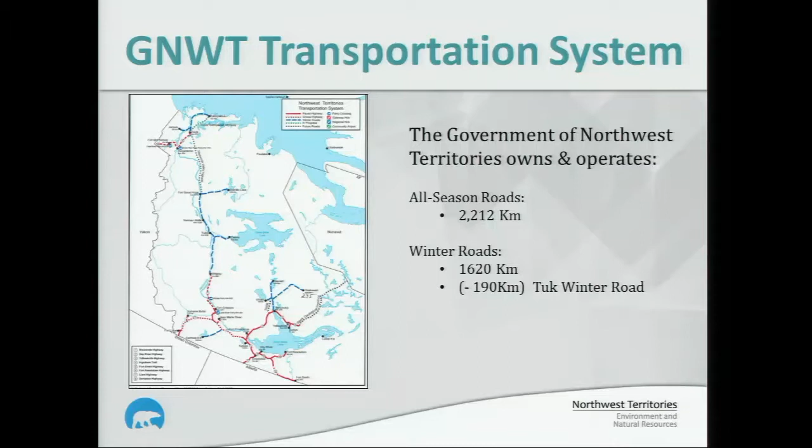The Government of Northwest Territories operates and owns about 2,200 kilometers of all-season road, and we operate about 1,600 kilometers of winter road, minus the 190 kilometers from Inuvik to Tuk, which this year they'll hopefully open this fall - I think November is the planned date right now. So that section of the winter road will no longer be operational. But it just goes to show the volume of winter roads that the Northwest Territories operates.

Separate from government winter roads, in the territories we have some very popular private winter roads - ice road truckers was part of that. By far the largest and most expansive private winter road up here is the JV, or Joint Venture Winter Road, which is a conglomeration of several mines that get together and operate the road as one entity, primarily for efficiency and safety reasons.

They run off the end of our Highway 4, about kilometer 69 on our all-season highway, and then run another up to 600 kilometers to the mine sites. Arguably, they're about the world's largest private winter road network, and probably one of the most efficiently run winter road networks.

Last year, just for stats, they had just over 9,000 loads going northbound, so that's 18,000 plus trucks returning. Just some stats on that.

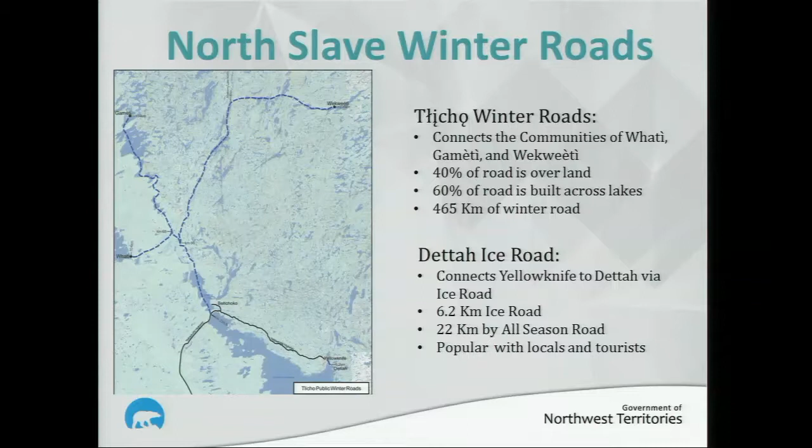People can come home for lunch and supper, back and forth, quite a bit easier. It's very popular with the locals in Yellowknife and with tourism. Anybody that comes up to Yellowknife in the winter, one of the first ambitions they have is to go down to the Dettah Road.

We have problems on the Dettah Road every year. It gets dark up here in the wintertime quite early, 3:30, 4 o'clock. Our crews will go down in the morning or evening to do a road check, and we'll have tourists laying in the middle of the road that's active and running, operating in the dark with all their lights turned off. Why? Because the northern lights are brighter when it's dark - you see them really well, but when you have headlights come up to you, it's not so good. As funny as it sounds, it's true.

A lot of people don't really think of the safety aspect of that. For the Dettah Road, we construct and maintain it ourselves with our own crews. So when we go down there with a heavy piece of equipment, a grader or a plow truck, or even a vehicle to do a road check, sometimes it's difficult to make them understand that you can't lay in the middle of the road - you've got to go over to the side. We plowed that road 50 meters wide, there's a reason for that, you can stay on the side. It's just interesting - you wouldn't normally see somebody laying in the middle of a highway, like the 401, looking at northern lights.

Our Tłı̨chǫ winter roads are crucial to the survival of the communities. Each community we go to - Whatì, Gamètì, Wekweètì, and Behchokǫ̀ off the main highway - they're running anywhere between 300 and say 1,800 people population. When you take into account fuel, groceries, construction supplies, all those necessities of keeping a community alive and thriving, they need that access somehow. For these communities, that's their only option to get heavier equipment in - the winter roads. Winter roads obviously reduce cost of living in the communities - power, heat, fuel, groceries, and general materials for themselves. There's also a socio-economic benefit.

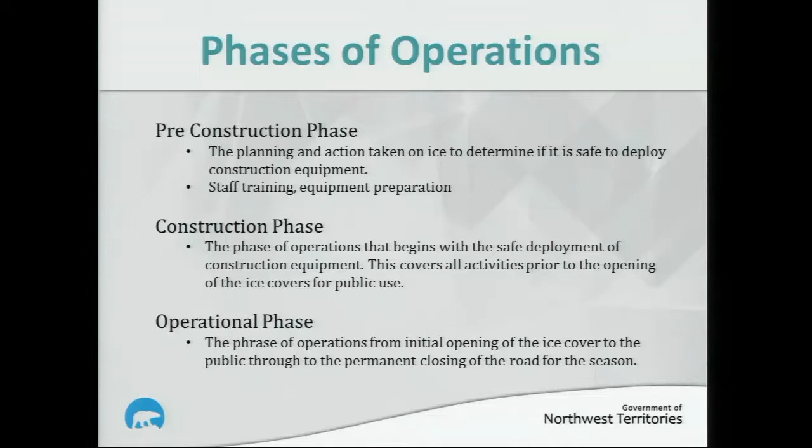So for the operations of our winter roads, we've got three stages: a pre-construction phase, a construction phase, and an operational phase. Those are pretty self-explanatory, okay?

When we're constructing, basically we're constructing an ice sheet on floating water, right? So we're constructing something that's never really meant to be constructed. We need to recognize that the ice sheet deflects and bends under load, and if we're not cautious and don't do things right and proper, and monitor them with controls and checks and balances in place, there is the potential for equipment to break through.

And when we implement our safety program and our rules and checks and balances, it's implemented with the requirement and the need to protect that integrity, right?

So if we go back to the access roads or the winter roads to our communities, if sometime from construction to supply to shutting down that ice sheet breaks or fails or we damage it, we risk not resupplying the community. And what a lot of people don't recognize is that most of our resupply doesn't happen until the very last week or two of our winter road season.

Why? Because we're trying to build ice the whole time to be most efficient, to get the heaviest loads in the quickest amount of time. So if you want fuel to your community or you want to build a house and bring supplies in, you don't want to bring in half loads in February. You want to bring in full loads, or even exception loads, in March.

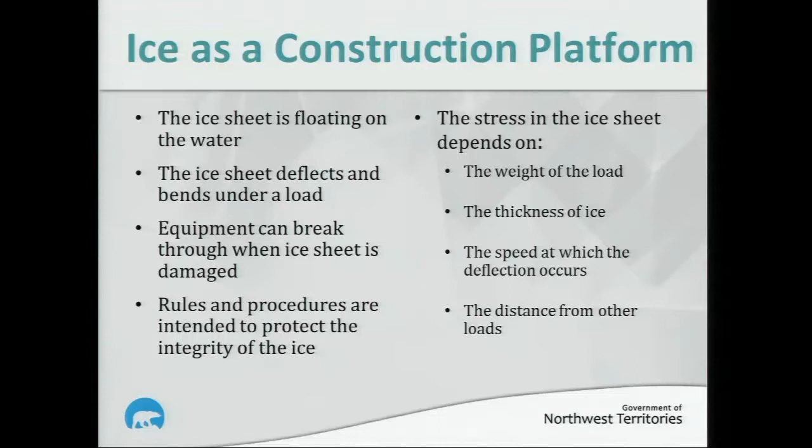So speed is a big item, and for argument's sake, with winter roads, the slower you go on ice, the better. All those shows we watch where the trucker gets out, looks at the ice, gets back in and says 'let's go'—that's for Hollywood. Because that trucker who says 'let's go' potentially breaks up the ice for the guy behind him, who falls through or goes through. So invariably, the slower you go, the better—and when we're really at the high end of our extreme load limits, we'll knock the trucks down to 10 kilometers an hour. For any of us who drive the highway, try doing 10 kilometers an hour for 400 kilometers.

The problem with that is cruise control does not let you go 10 kilometers an hour—you need about 15 to engage it. Our normal operating speeds with our heavy trucks on our roads are about 25 kilometers an hour, but there are extreme cases where we'll slow them right down to 10.

And then separation of loads as they go. When we're talking about ice, there are several different types. When we're doing weight calculations for ice, basically we're calling it blue ice, or clear blue ice, and that's what you're seeing here. You're seeing cracks—that's a normal consistency of ice.

You want it, on most lakes, to be a clear or clearish blue color, and on rivers you get a little bit different consistency, but sort of the same idea. So all the calculations and design specs we have are considered to be clear blue ice.

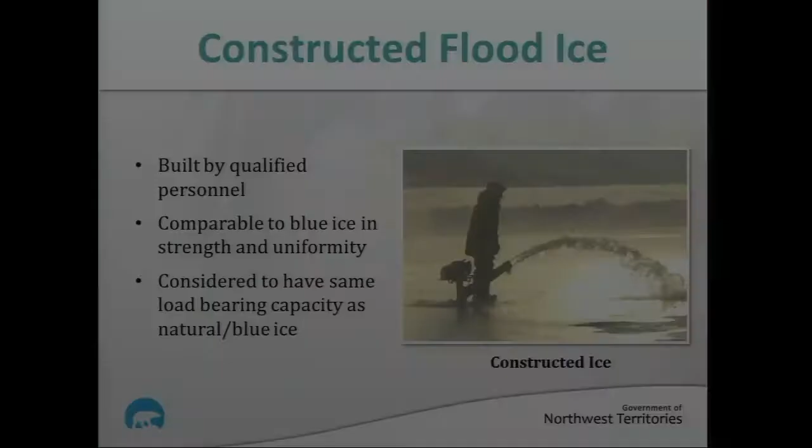There's occasionally sections on 465 kilometers of winter road that aren't quite as thick as we'd like versus the rest. We don't have the budget, ability, or time to flood all of our winter roads. We'll flood rivers because they're relatively short crossings, a kilometer or less, and we'll flood short sections where, on maybe a 300-kilometer winter road, you have 3 kilometers holding you up from a substantial weight increase. So then we'll send flood crews out for that.

Over the years there's been a fair amount of discussion about flooding and the integrity of flooded ice. What our engineers have determined is that as long as the floods are done appropriately, without too much snow and air mixed in, our weight calculations would be the same on flooded ice as they are on natural ice.

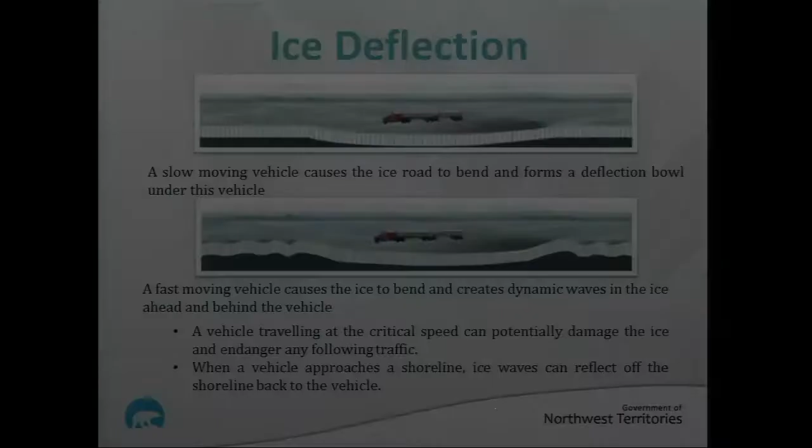Being government, we want a relatively large safety factor. So under normal circumstances, the loads we allow those trucks to run on, and the amount of ice we have, is more ice than we need for those loads. So it's still a critical concern to us, but we don't have someone on each lake watching a truck to make sure they go the right speed. We'll have highway patrol, RCMP, and our own maintenance people out there monitoring. And funny enough, the communities now are becoming quite educated and they understand the importance of this.

More often than not, I hate to admit it, we will get a call from one of the community members saying, hey, we were out there and this truck passed me, or it was coming down the lake really fast. We have only a limited amount of trucking companies that run on the ice. We'll call up one of their safety managers and we've had drivers fired right away for it. The ice trucking, ice construction industry, for all the kilometers we put on, it's a relatively small industry, and they understand that importance. I think last year we had a complaint about one of the fuel truck drivers going north towards Gamètì. He made it back to Highway 3, a vehicle picked him up, and he was let go, just like that. Now, not all our complaints are valid, but certainly we try to keep on top of that.

And then as we get into stretching the envelope of letting heavier loads on thinner ice, then we have more controls and measures in place ourselves.

Okay, so separate from driving on ice, there's this issue of parking on ice or potentially stationary loads on ice. So the calculation is ice is flexible, but it only flexes for so long. What happens is the calculations we have is for a specific load or a specific group of loads to travel across the ice at an approximate specific speed and move on, not to sit out there and park for an extended period of time. So the general rule of thumb is 2 hours. As far as operating practices go, none of our truckers or none of our heavy equipment are allowed to stop and park on the ice. No napping, no sleeping, none of that.

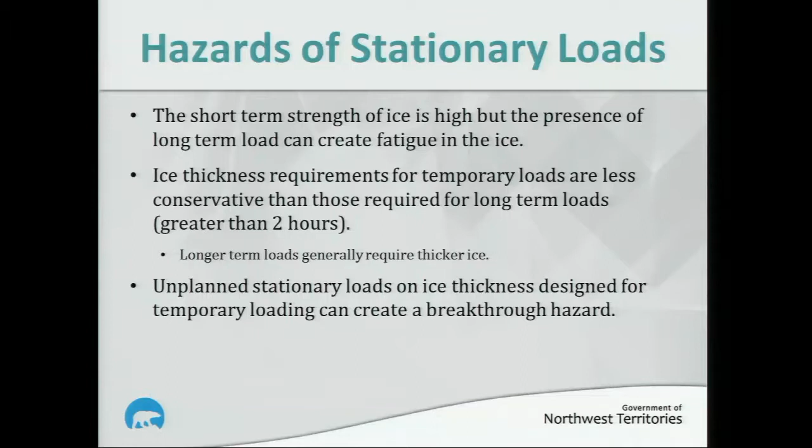The reality is, yes, sometimes something breaks down and we have to recover it. 2 hours, when you're at our max threshold, is acceptable. After 2 hours, we're having to become really cautious, and you run into the issue of the ice starting to fatigue and break.

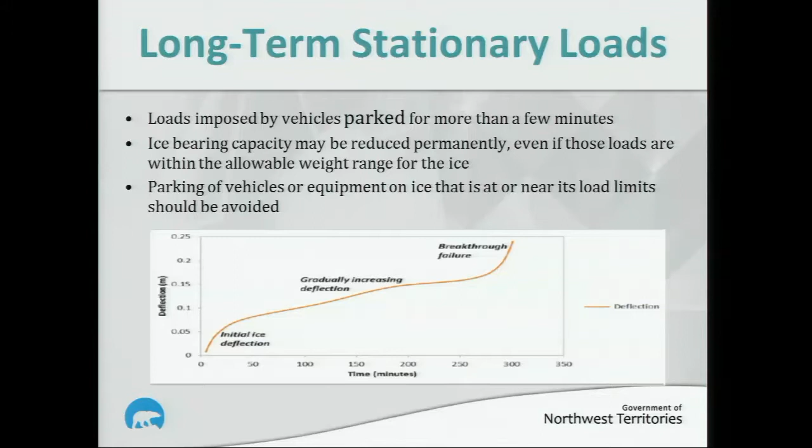Prime example of that was the winter of 2016. We've had challenges like we discussed before about our weather not being normal or inclement, or whatever you want to call it, global warming. We have houseboaters out on the back bay, which probably most of you have seen or will see in the next couple of days. And one gentleman decided he was comfortable with the ice thickness they had.

They drove out to his home there and parked out in front of his place and went to bed, and in the morning his truck was gone. Sounds funny, but he didn't, you know. Now, I'm certain a couple of his neighbors might have said, hey, Jimmy, I'm not sure your truck should really be out here, but it's one of those rare examples where they actually lost a vehicle. Parked it, it was fine, and the ice fatigued overnight and went through.

Okay, ice has cracks in it. It naturally has cracks in it, and then, of course, it has some cracks that we don't particularly want, and this happens to be one of them. You can see the crack running here. Primary reason for this particular cracking is snow load on the banks.

When we get into construction later, we'll talk a bit more about it, but what you want to do when you construct a road is construct it in manageable sections to full width. You don't want to construct, and for years and years, our contractors constructed 20, 30 miles, 10 meters wide. Then they come back, when they're all done, they get their progress payment to get to the mine, or the progress payment to get to wherever they're going, then they come back and start widening it out. Well, the problem is that now you've got a 10-meter wide section that has lots of ice because it's got no insulation, it's freezing really well, and every time you drive back and forth on it, you hairline crack it, it heals, and it produces more ice.

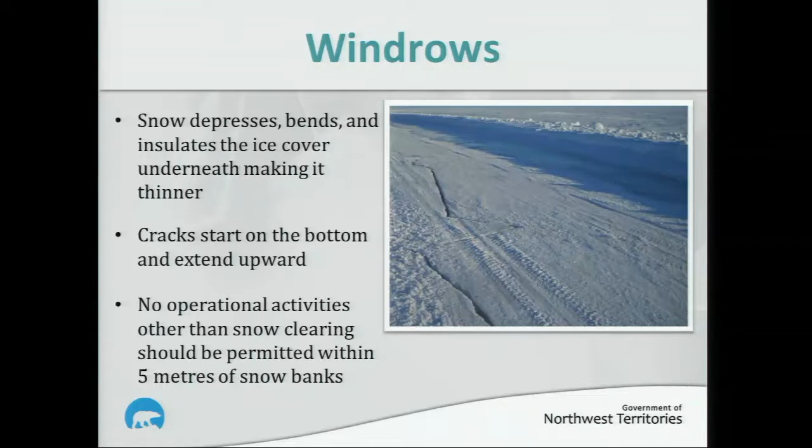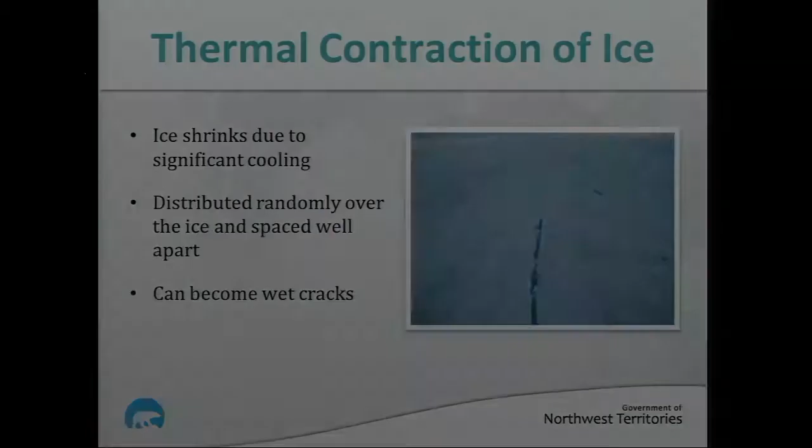Other cracking, okay, so ice shrinks when it gets cold. A lot of people don't realize that. Ice actually shrinks. So this is just from the cold down to the center of the road and ice shrinking. Not necessarily a concern unless it goes through more than about 50% of the ice sheet. In most cases, water at some point will bleed back up, or we'll send maintenance crews out to water them and away they go.

This type of cracking here is very normal for us during the wintertime. As you get close to the end of the heavy haul, you get more and more of that cracking, just from the stresses of the trucks and the weight and that.

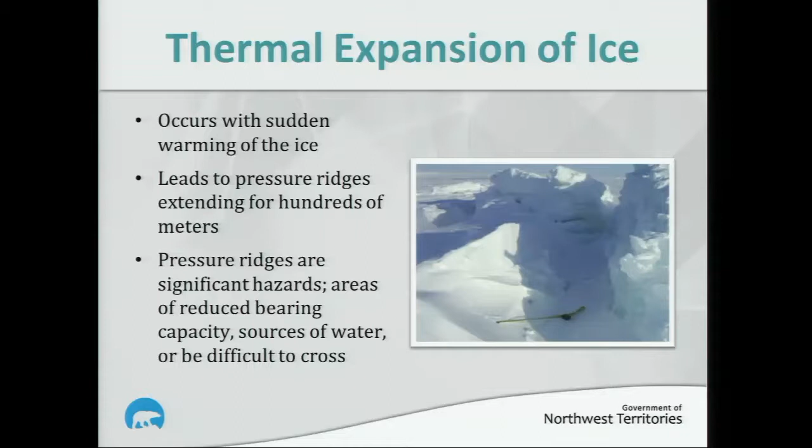This here is the opposite of that. These are pressure ridges that are built. I'm sure most of you have seen fairly substantial pressure ridges going up and down lakes. They can go for miles and miles, and they're problematic for us, of course, because quite often we have trouble safely getting across them. They might have less ice, more ice, broken up, types of issues like that.

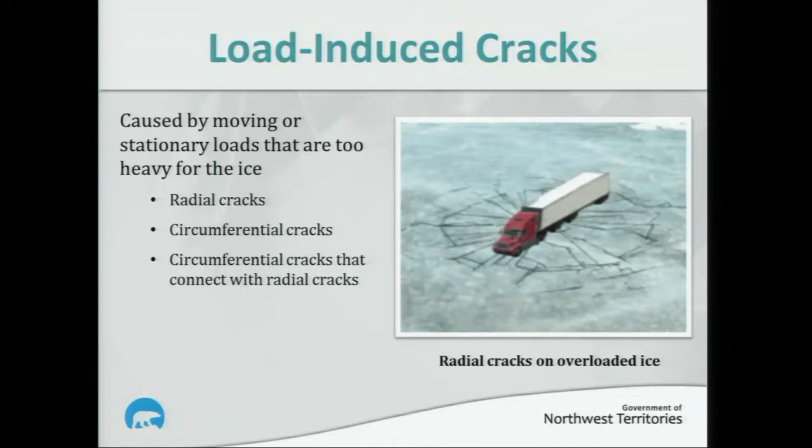And then this is kind of an example we talked about already, fatigue cracking. That's just a load sitting there for too long. You can see how we're getting circumferential cracks, radial cracks, and finally that truck's going to go through.

So for ice, we have levels of confidence in the integrity of the ice sheet, effective thickness of the ice sheet, and accuracy of loading. Those three things. We need to know what our loads are and how much they weigh. We need to know how thick our ice is, and we need to know the ice is fairly good quality ice. Does that make sense?

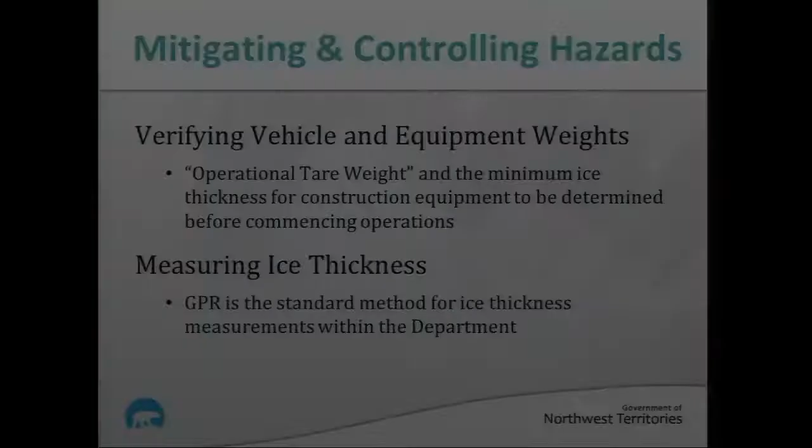As far as weights go, ideally we want to have all our equipment weighed, scaled, and we call it an operational tare weight. That means the weight that equipment's going to be when it's out there operating, whether it's got an attachment on it or not. And then we also want to know the GVW so that you know how much that truck will carry when it's fully loaded.

Measuring ice thicknesses, the old adage of taking an auger and drilling through holes worked. There's new technologies now, and our government believes strongly in ground penetrating radar, GPR, which sends an electrical pulse through the ice to the water, reflects back, and gives us very accurate information, very accurate data. The technology has been around for pretty close to 20 years. User-friendly software's only been around 5 or 6 years.

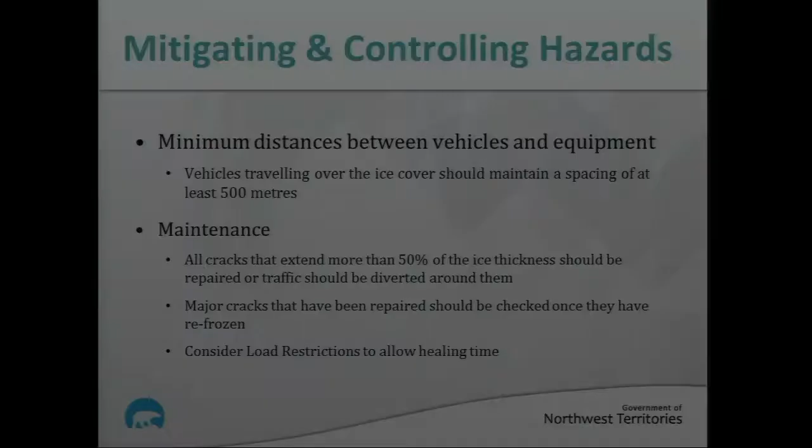As you're aware, the primary construction tool for ice is water. As long as you've got cold temperatures and water, you can pretty much fix over time, if you've got enough time, any issue that happens on the ice.

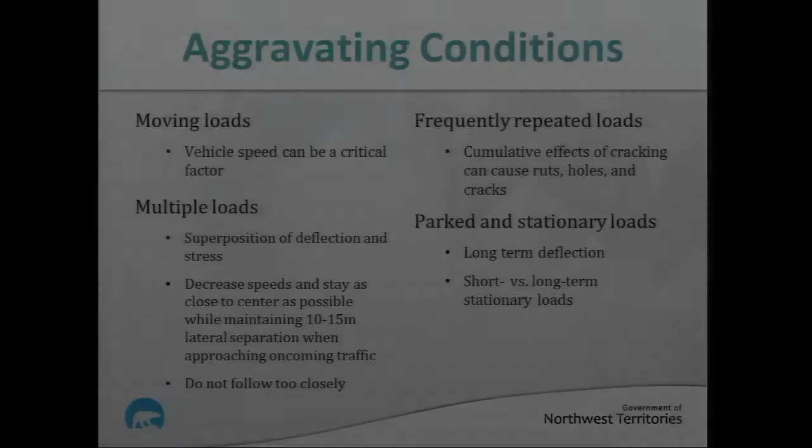Issues of operating on the ice, of course, are moving loads, multiple loads, frequently repeating loads, and parked and stationary loads. We've discussed most of these already. As you get more and more use and heavier loads, the ice is going to be stressed more and more, no different than any other highway system. So you want to monitor it closer and closer.

Again, we talked about weights. Ideally, you want scaled weights. In some of our communities, we're not able to get scaled weights, so they'll use manufacturer specs on some of the stuff. We have access to Highway Patrol, so we'll quite often ask them to take out portable scales and weigh equipment so we know what it does. We'll also use their portable scales for weighing commercial stuff on the road if we're concerned about a weight of something that's on the road.

Again, monitoring vehicles so they're not too close together, and at times we'll send our own staff or Highway Patrol out to enforce safety rules, because there's always someone in the group that wants to stretch that a little bit. Someone doesn't really think that going 20 kilometers an hour makes a difference. It might not make a difference for his particular load, but it'll make a difference for the 600 loads coming after him.

So here we get to calculations for ice bearing capacity. P equals A times H squared, a fairly simple mathematical equation. P being ice bearing capacity in metric kilograms, H being the thickness of your ice in centimeters, and A being a value assigned to that calculation.

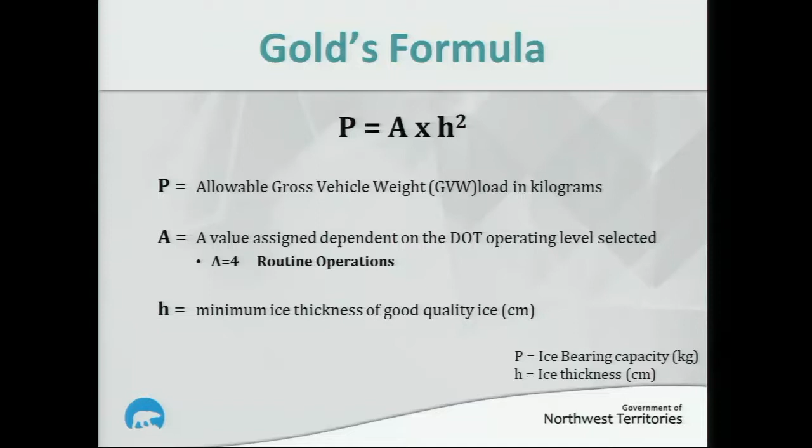For normal operating procedures in the government of Northwest Territories, we use a value of 4. That's a proven number on Gold's formula over several years, and it leaves a substantial safety margin in place. So we talked about controls and measures, we talked about having people out there monitoring. Probably our best control and measure is that value right there, 4. It leaves a fair amount of safety and tolerance.

For example, if the load's slightly heavier than it's supposed to be, we'll probably be okay. If the vehicle's going slightly faster than it's supposed to, we have that little bit of buffer in that value of 4. As you increase that value, your buffer gets less and less.

So standard scenario, we go out and we measure the ice, we have 50 centimeters. 50 times 50 is 2,500, times it by that A value of 4. Which means we assume, following our controls and measures and regulations and that the ice is good quality and all that other good stuff, that 50 centimeters can carry about 10,000 kg. That calculation will work for any thickness of ice you have.

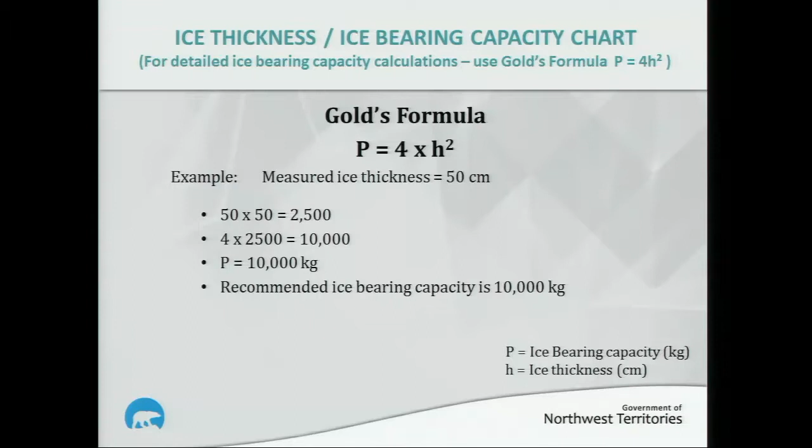Times the height squared times the consistent value of whatever you want to use. We're using 4 in this case, and that'll give you the ice bearing capacity. Any questions on that? Okay.

When we first go out, we'll do some drilling, but we want to profile if at all possible. We're using newer technologies, trying to use either a semi-submersible or a piece of equipment that floats when we first go out on the ice. We've got a little profile unit you can see in the back of that machine. It's a computer antenna that sends a 5 megahertz wave or signal into the ice, back up, reads it, and then allows us to see it on a laptop computer.

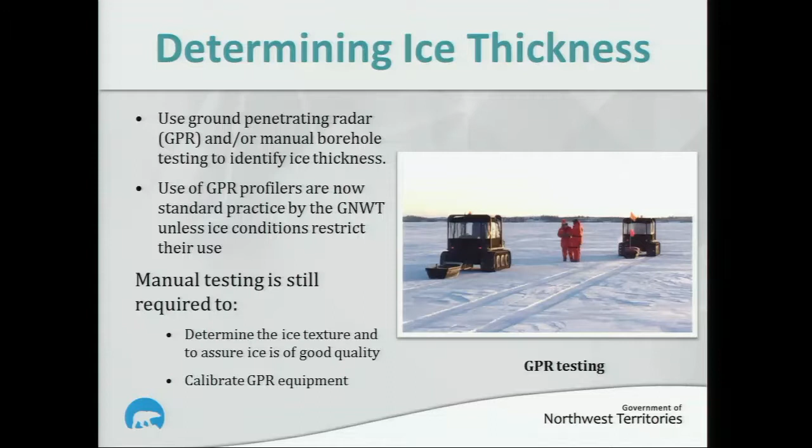Should mention that manual drilling is still required, though. It's required to calibrate the computer on that unit, and it's also required to ensure that the ice we're in is good quality ice versus fractured ice or other types of things. So there are times you need to visibly see that. They are working on new technologies right now that might take some of that into account, but at this point in time, they can't yet, or not reliably.

This is what would be a normal GPR line. You can see Yellowknife here, and you can see the community of Dettah there. So this is about 6.2 clicks. You can manipulate this on a Windows program however you want to, but what it really does is identify the thin spots at a glance. So anything that's yellow or red is thin. You can set the parameters of what you want thin to be when you go out there.

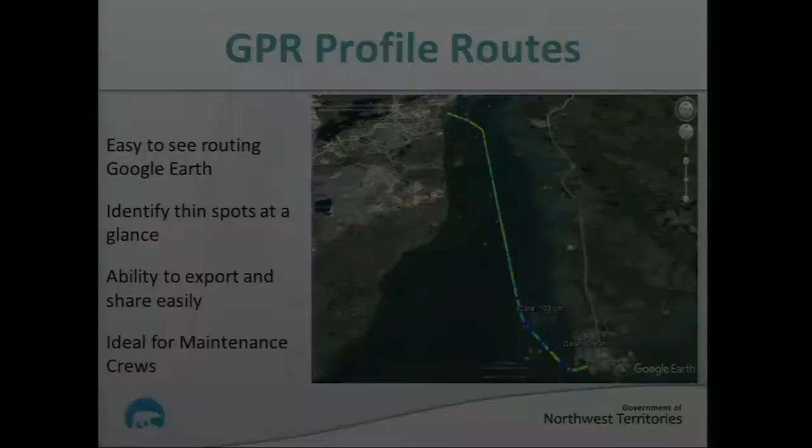It gives you the ability to share the information quickly and easily. And it works really well for maintenance crews, because if I need to, I can send a maintenance crew to that red spot right there, give them within a few meters of exactly where that spot is, and they can do flooding to increase our ice thickness there.

Separate from that, it gives you some very general information without going into the program. In that particular spot that was red that I'm worried about, I can zoom in and it'll tell me. Google Earth is a wonderful program, but it won't pick up all the spots that our actual profile unit shoots, so it'll average maybe 3 to 20 spots, roll them into one dot, and then tell us the average ice thickness, min and max right there.

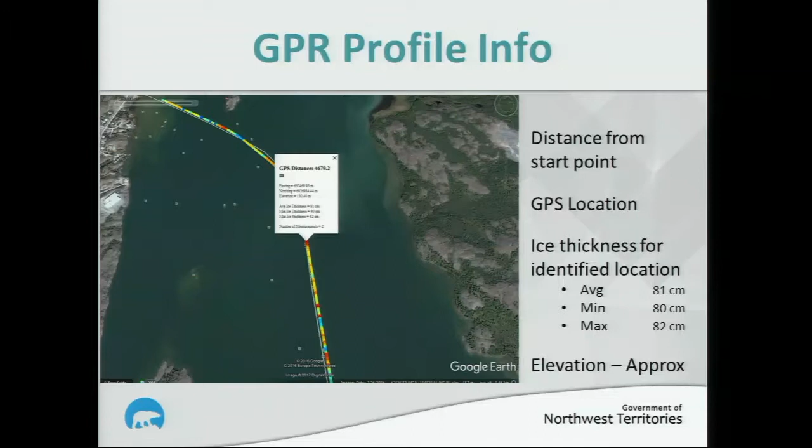We don't use this for determining our minimum ice thickness. We use the program that's more detailed that tells us that. What's nice about this, though, is it's quick and fast, something you can send on to a manager or supervisor or to a maintenance guy that has to go out to location and do some work or a check. Quick, fast, easy, works really well. And we've only been able to do this for about 5 years now.

So we talked about different levels, and we talked about that A value of 4. What the new guides allow us to do now is go into what's called a routine, a normal operating cycle, and then if we need to, an enhanced, and in some cases an acute range. As you go from normal to enhanced to acute, we put more controls and measures in place.

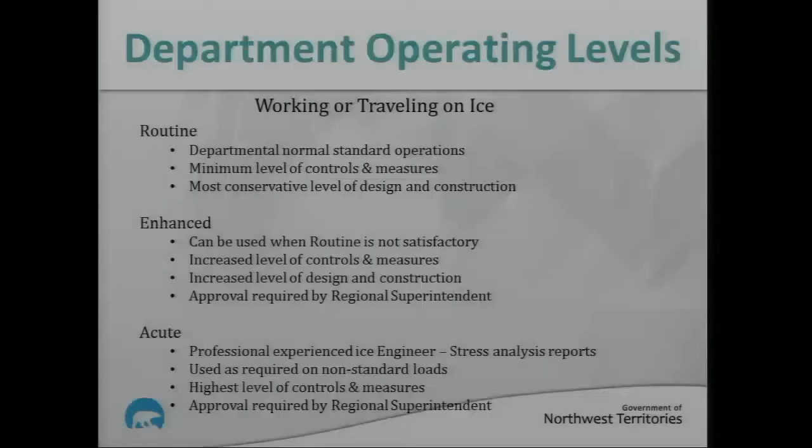We'll check the ice more often, have more monitoring going on, et cetera. Within DOT, or within Department of Infrastructure, we stay within the routine and enhanced modes. Once we get out of the enhanced mode to the acute, we'll then go to an ice engineering company and go away from a single point load that Gold's formula is, instead go to a multi-point load spread over a certain distance, and those calculations will be engineered.

So to put it simply, depending on whether we're doing construction or maintenance, and depending on some other scenarios, we'll use an A value of 4 for routine, an A value of 5 up to a maximum of 6. Usually 5.5 is as far as we'll go on the enhanced, and once we get above 6, that's it, we'll go straight to engineered loads. None of our crews have the ability to go to enhanced or acute without a sign-off from our superintendent, so we have controls and measures in place for that.

Now you're looking at a chart here. Our normal operations: less resources, less robust QA, passive controls, more conservative. As we go up the chart, this allows us, say if we've got 300 kilometers of road and we're trying to get a heavy load into one community, maybe we've only got a stretch of 4 kilometers that's problematic for us that we can't get ice to grow on, or we haven't been able to flood enough to get it to grow on. We can go into the enhanced or acute operations mode for those 4 kilometers.

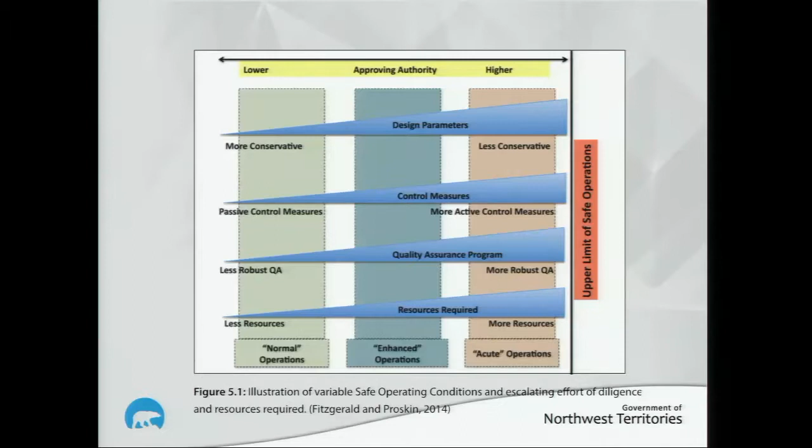We can have staff staged out there, we can have highway patrol out there, we can do additional ice checks closer together, all those kinds of things for that short section, and then go back to normal operations outside that section. That's the big plus of this new guide—it allows us to go to those areas legitimately, following a process, and get our loads into the communities when we need to. With more problematic times on the ice and warmer and warmer temperatures, we're looking at probably having to do this more and more often to be able to do the same things we could do 10, 15 years ago.

Now that we're doing maintenance or running operations on a river, we have the routine mode, the enhanced, and the acute mode. In acute mode, we'll go out there, get information, and provide that information to an experienced ice engineer, and they'll do a stress analysis and let us know whether that load can go or not.

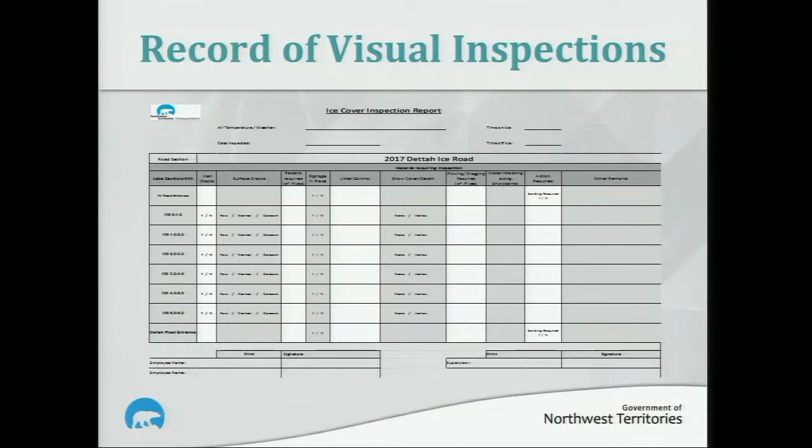The short version is we require our staff to go out and do regular visual checks, and nothing happens unless it's on paper. We talked already about speed limits and spacing, inspections, signage and enforcement, staff training we've discussed for the last 30 minutes or more, and monitoring and reporting.

By law, we have to have, along with workers' compensation requirements and our own, we have to maintain log books, we have to maintain copies of the GPR data files, and inspection reports.

We do as much as we can broadcasting to the public because then they can start planning their loads for the commercial loads, and the public can travel. It's important for people getting out of the communities.

We do Twitter updates now. I don't think we're doing it on Facebook, but we do Twitter and internet updates, as well as winter road entry signage when vehicles go on the roads.

And then we have that authorization process for when we go from normal operations to enhanced and acute. We talked about changing that A value.

So we've gone through the book now, and then the appendices are live documents that we'll continue to work with over time. Some of them were not even absolutely completed yet, but in appendices A, B, and C, they have the different loading charts.

One of the risks we talked about at the very beginning is having the public be aware of everything we do — somebody from the public could say, hey, I'm going to use an A value of 6. If you've got 100 centimeters and you're using an A value of 4, that load's good for 40,000 kg. If you use an A value of 6, that road's suddenly good for 60,000 kg. That's a substantial difference.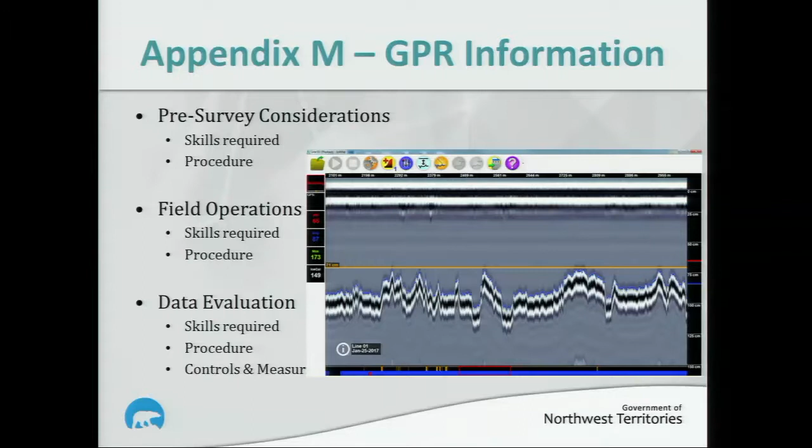We want to make sure we have skilled and qualified field operations, and skilled and qualified people to evaluate that information. So we're back to the exact same things we talked about before: confidence in ice integrity, confidence in ice thickness, and confidence in loading conditions.

We've talked about public safety, community resupply, environmental regulations and issues, risks, and communication. That's the end of the safety portion of the presentation.

I'm running a little shy on time. I have a construction portion if we want to look at, but before we go there, is there any questions on the safety side of it? Yes, sir.

You mentioned a truck really can't sit still for more than 2 hours, and you mentioned one stretch of road that's about 400 kilometers, so that's 40 hours. So do these trucks run team, or what do we do about the safety of a driver? You wouldn't want somebody driving 40 hours. One, it's beyond the hours of service laws. Two, I think they'd get tired.

Correct. Well, to clarify, we don't want any vehicle sitting on a sheet of ice longer than 2 hours. At an A value of 4, it could probably sit there for a couple of days, I gotta be careful saying this. When you get close to an A value of 6, that's a whole different story. So the recommendation is no longer than 2 hours.

But your primary question is, where do they stop, what do they do? Remember we talked about 60% lakes, 40% land, depending on which community we're going to. Our longest lake that we're running the guys on is probably about 38 clicks, and the rest are shorter. So when they get to the portages, we'll find spots for them and plow triple lanes and have areas for them to pull off. Works good.

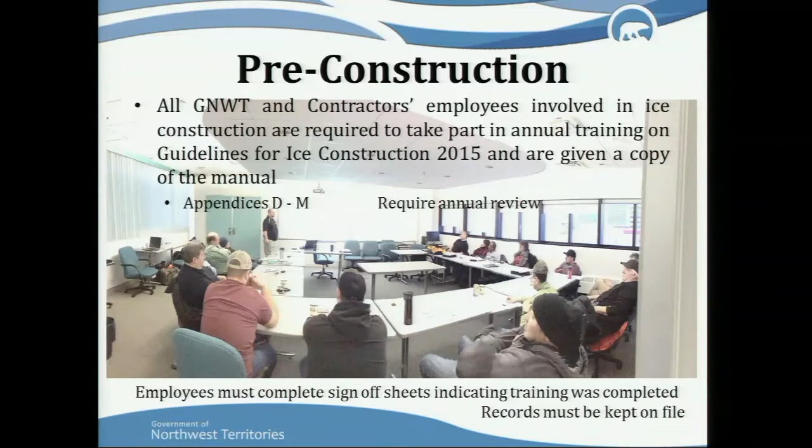First couple slides, we talk again about requirement for annual training. We've gone through most of that. We talked about our new guide, okay? We talked about not only the requirement for annual training and sign-off sheets and having it documented and keeping workers' compensation happy and those types of things, but also the reality now of going out and going to work.

The safe work procedures we have for the crews going out, checking the ice and starting to construct, starting to plow. Got to have daily tailgate meetings, minimum weekly safety meetings, and anytime there's a concern or issue, everything shuts down. We go through it with the supervisors. If supervisors can't fix the problem or are uncomfortable with it, they'll get a hold of myself or someone else. We look at it and then move forward, okay?

Okay, so we talk about the requirement for meetings, safety meetings, making sure we have the proper safety gear, those types of things. Identifying the supervisor, ensuring we log in and log off the ice at each shift. Making sure the shift supervisors communicate back and forth. We want no surprises when our crews are out there, okay?

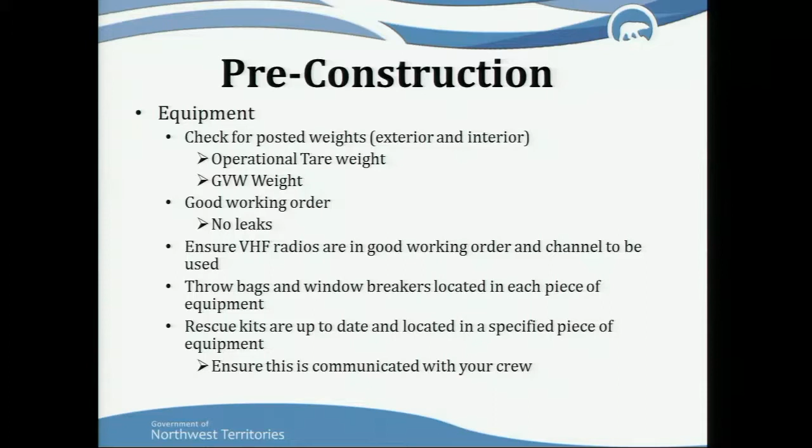Talk about the requirement. Each piece of equipment we have is required to have the operational tare weight and gross weight on both the outside and the inside of the vehicle. We had a supervisor who was given a week off without pay for not having those weights on his equipment. Our drivers have to know what their equipment weighs, and they have to know the ice thickness, okay?

Talking about training and training records, everybody has to ensure that they have had training and are qualified before they're out and operating stuff, right from the laborer to the supervisor, okay?

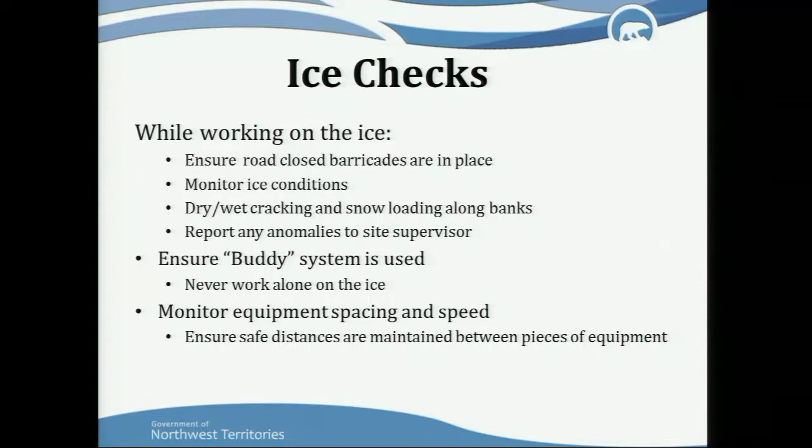We talk about making sure the public is safe while we're working on the road. We've got to have all our road closed signs in place. The public has to know that road is not open. There's so many liabilities that go with that, because when we're out there constructing, we know what ice thickness there is, and we know what our vehicles weigh. The public is just interested, they just want to get out early, right?

Okay, we talked about using GPR for profiling when we first go out on the ice. This is a job I helped on out of Tsiigehtchic, close to Inuvik.

No profiler is going to go over that, right? It's not going to. So there's still times we have to manually core. You can see guys here with tie-off ropes and steel bars checking to make sure there's no holes in the river. This is on the Mackenzie River. And then these guys are tied off and they're going out.

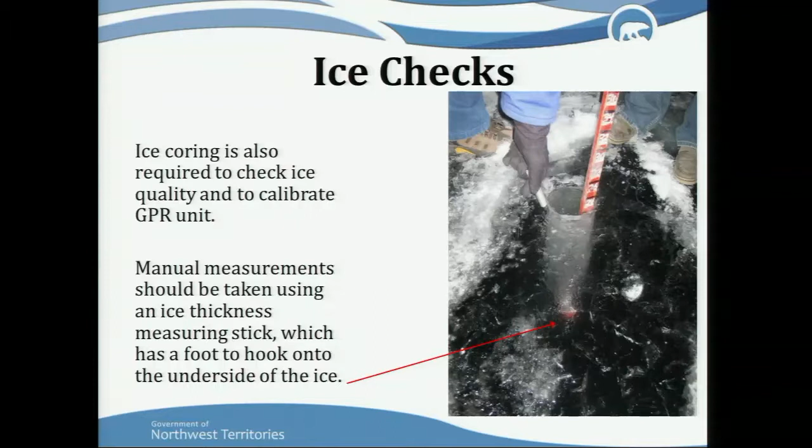When we're doing manual coring, you'd think measuring the ice is easy. It is, but there's a process to it. We want to use a measuring stick of some type with a foot or a piece on the bottom that goes across the ice and holds it there. So you've got something to push down and pull up on and measure it. There's so many times people take a tape measure and try to guess what it is or hook it on the side. That's not the way to do it.

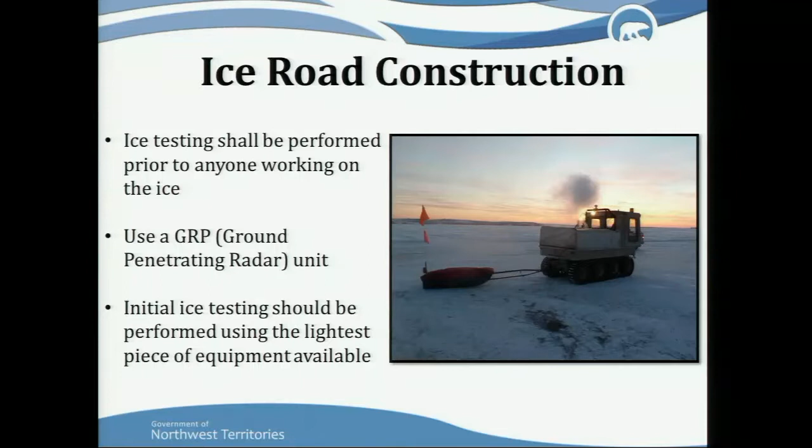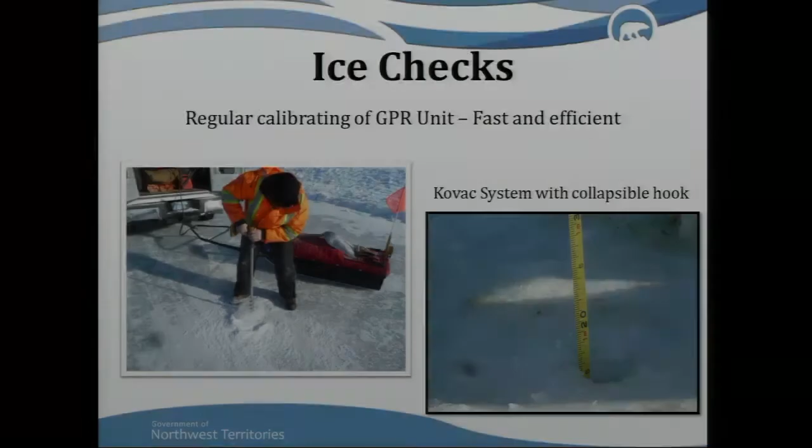This is a GPR unit in the back of that sleigh too. In the last few years, different companies have come out with this. This one has to be a Kovac system with a drill, just a little 2-inch auger. Mounts on an electric drill. It's fast and easy - you don't have to carry gas and try and get your auger to start.

Push it through the ice. It's got a tape measure with a breakable bar on the bottom. So when you push it through and pull up, it locks on the bottom of the ice, and you give it a little tug, and then it comes up again. Quick, fast, efficient. Carry the battery in your truck, and away you go.

We want to make sure that when we're out working on the ice, that we pick an alignment, we profile that alignment, and then nobody's allowed outside that alignment. Whether you're using the tracks for the machine, or they're putting stakes out, once that alignment's picked, nobody's allowed outside of it again to work unless we do more profiling, because we don't know what the ice thickness is outside that alignment - only the stuff that's in the alignment. And we document all that.

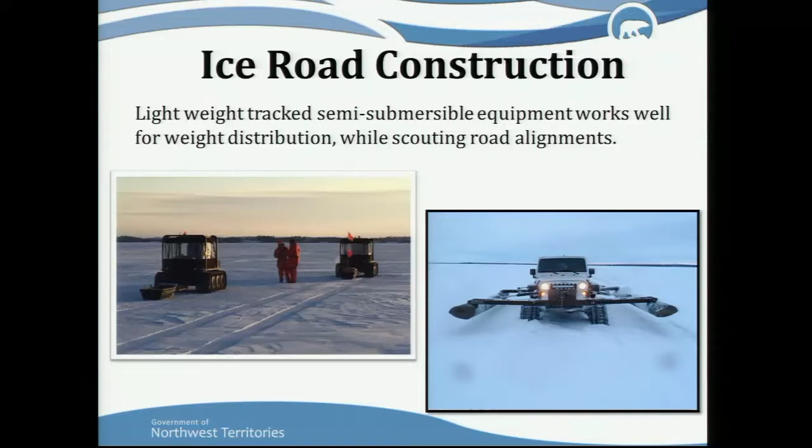Now we're going out and starting to work. These guys have a plow truck right behind them. This is one of our contractors' units - just a regular Jeep with hydraulics that they put on it and 2 outriggers. So when he's out there working, if something happens to go wrong, the assumption is those outriggers will catch on the ice. If he happens to break right through, the engineering on that says it'll float. So more and more importance for putting on this kind of stuff now because we're getting more and more anomalies out on the ice - we're not getting consistent ice sheets.

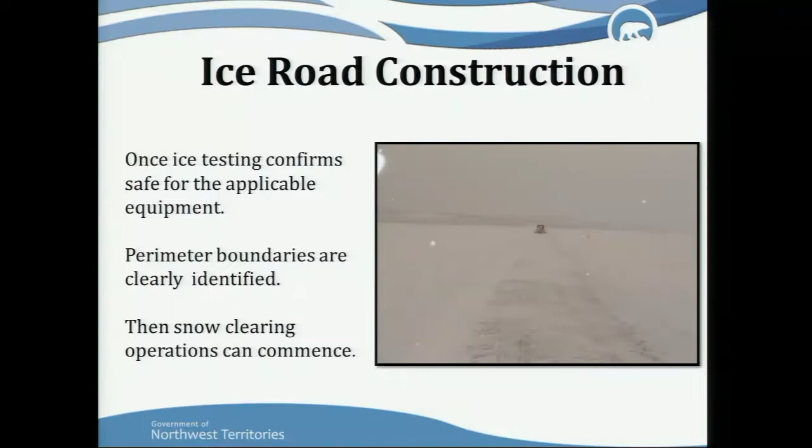So now, testing's done, plowing started. You can see some markers - it's hard to see out there in the snow, and one further up here. That's the center of the alignment that we want to stay on, and our crews go to work.

Depending on where we are and what we have, our own Department Infrastructure crews construct and maintain the Dettah Road, we maintain the Tlicho roads, and then we have one road that we have a contractor construct and maintain. For maintaining our roads, I have access to 2 highways camps, about 60 pieces of equipment total between Yellowknife and Behchoko, so we can ramp things and move things pretty quick when we need to.

And then on rivers, we'll use what they call the technology of spray ice. Although the machines are old, it's a technology where you take water and spray it in the air at the right temperature, at the right angle, with the right nozzle on it to break the water droplets up, and it lands as ice - it doesn't land as water. You can manufacture, around 30 below, up to 6 inches a day in ideal conditions. If you mess up and put too much water or not enough water, it makes snow; too much water makes a flood, and you can hold a crew up for 4 or 5 days.

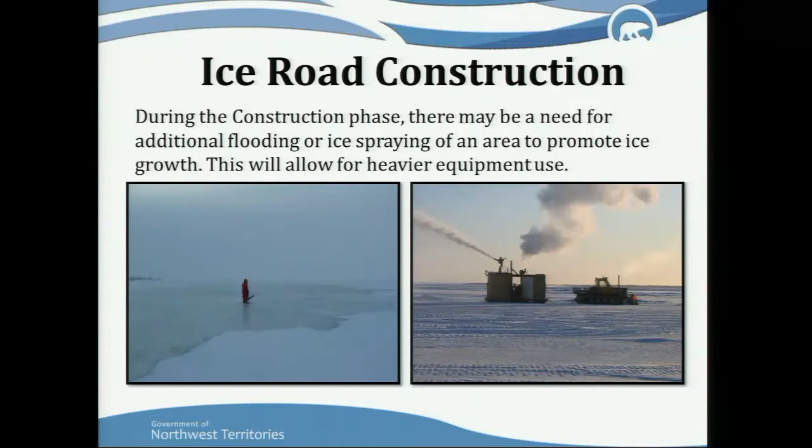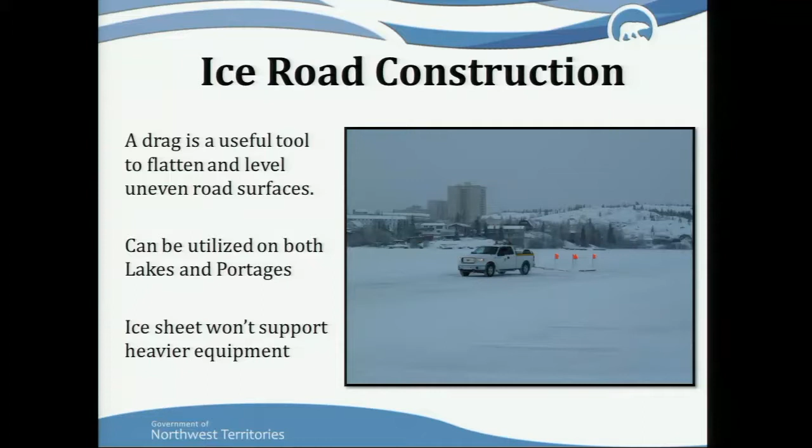Something as simple as a drag behind a half-ton. Ice doesn't always freeze level, right? You get wave action and all that kind of stuff. Before we had the public out, we couldn't have a lot of weight out there, so we had a drag being pulled behind a pickup truck. It works. It levels snow off on the ice, breaks ice tops off, away it goes.

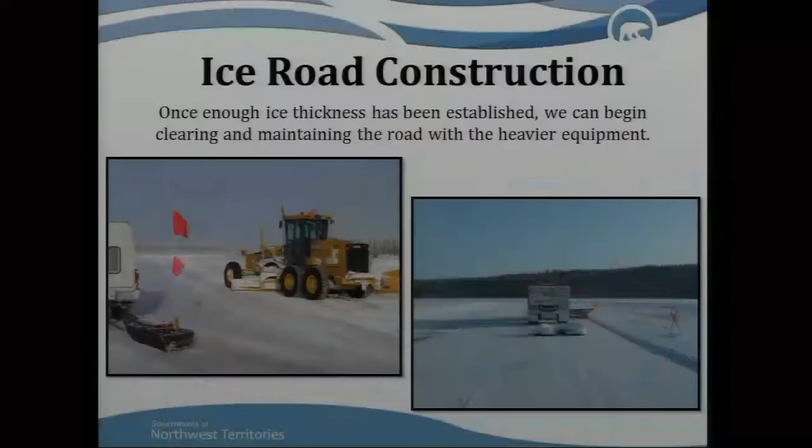Drags are really popular with us, smooths the road out, so we'll pull drags behind our plow equipment quite often. There's a couple pictures of this tri-drive unit, and this is just one of our own plow trucks. So what you want to do is, once you start clearing, get that snow off while it's still soft, fairly quickly and done.

You don't want to go back into something and plow it again once you've broken the snow up. It's no different than you walking up the steps for a week before you shovel, right? Makes a big difference.

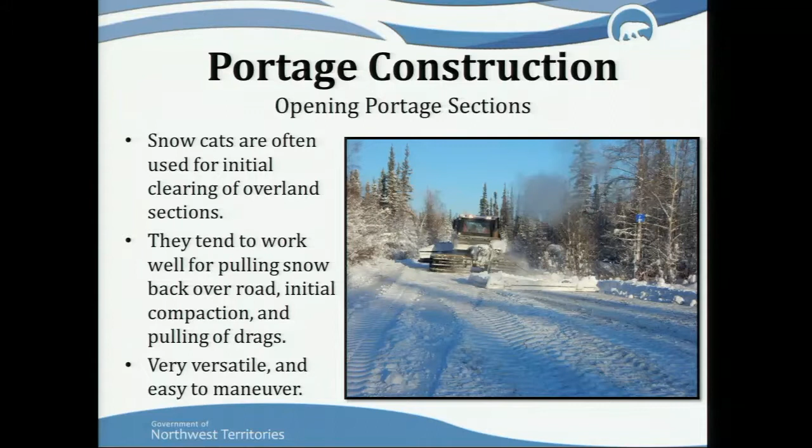Snow cats are really popular. This particular snow cat is good for pulling snow in from the sides. Our regulators require us to have a minimum of 10 centimeters snow coverage on our portages, so he'll push snow out, drag it, water, and then pull snow back in and continue to drag it.

Same thing, they're using another grader, a small grader with a drag, a loader with a drag.

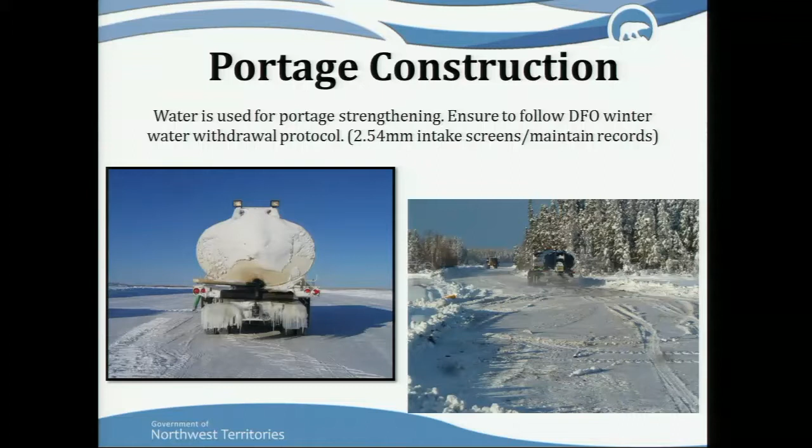We've got to make sure we follow all our regulations. DFO says we have to use screens with holes no larger than 2.54 millimeters for fish protection. They're problematic quite often in the real cold, but we carry a Tiger Torch and heat them up to use them there. Our contractors are going to new technologies.

This is actually a watering vehicle that they can put a plow on, but it's got big flotation tires on it, so it's not running up the land, and they can carry a lot more water.

Our road's open to the one community. There tends to always be a lineup of vehicles waiting there. If you were landlocked in a community for 10 or 10 and a half months, we're waiting to go, right? Even just to go for a drive, we're waiting to go.

A lot of people don't understand how fast our roads can blow in and be dangerous and problematic. Years ago, anybody that traveled a winter road had a good old Chevy or Ford or maybe a Dodge truck, 4x4, or a snowmobile in the back, and away we went. Now we're having people going up there in Golfs, Honda Civics, no safety gear.

You're laughing, but it's true, it really is. You're looking at these people and shaking your head because they're out there stuck in the snowbank in running shoes. That's it, I'm getting the evil look, so I better hurry up here.

Just talking about cracks, normal cracking and maintenance we have on them. Again, in the maintenance stage, we're watering, we're flooding some sections by hand. I apologize for going quick, but I think I'm just out of time. Again, these are our maintenance crews.

What's critical for us is during the first third of the winter road season, that's when we build the majority of our ice. As the ice sheets get thicker, it grows slower. So you want no insulation on your ice sheet at the beginning of the season. Every time it snows, we want to be out there plowing.

In the end of March, if I have 6 inches of snow on the lake, not a big deal as long as people aren't getting stuck. But I got 6 inches of snow on the lake for a week in end of January, early February, and I just lost 4 or 5 inches of ice growth. Add that up over a few times and it makes a big difference. This is the sort of stuff I wouldn't normally show off, but it's a reality.

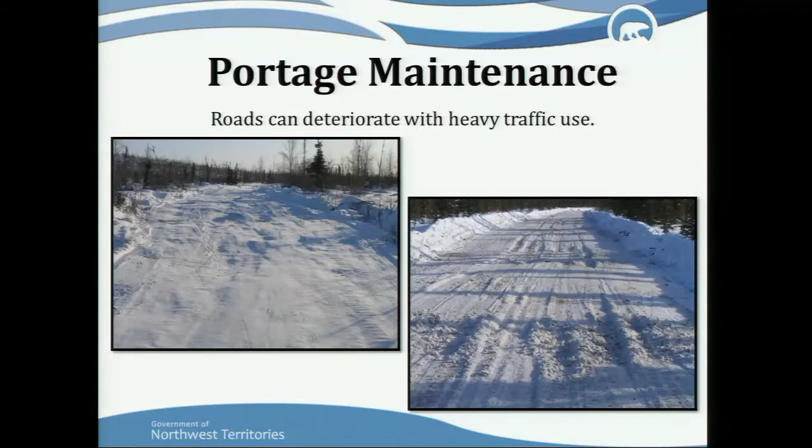Portages get beat up, so we want to get working on them. Overflow, we have lots of trouble with, so we're working on an overflow patch there. Here's our water trucks out, base strengthening, picking up with the portages again.

A lot of people don't think about portages being problematic in a storm. Well, be out there in a little two-wheel drive car and drive on that portage - you're gonna have a hard time getting through.

So make sure we've got our safety gear with us when we travel. Watch out for hazards - people working, water trucks, steep hills, wildlife. One of the great things about working on a winter road, there's not a lot of traffic up there, especially when you're constructing. You have those opportunities to see wildlife.

Make sure you watch for other traffic, be considerate. Don't go 50 miles an hour around a corner with your back trailer sliding sideways up in the ditch. Good for TV, it's not good for people on the road.

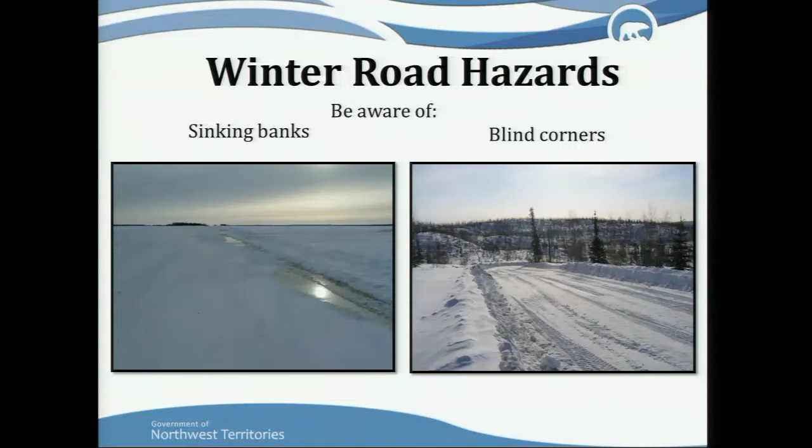Again, with climate change, there are so many locations now that we're getting this type of overflow problem where it creeps in. You gotta send a grader out or send a loader out. And we've had forest fires in the North Slave region for a while now, so that changes the water flow patterns - the vegetation isn't holding the water like it used to. So all those new kinds of things are challenges we're having.

Again, in some areas, just because of the reality, we're down to one lane, so we want to be cautious of that. Some fairly steep hills, other obstacles, rocks, and we want to mark those out for the public.

This is a new one, okay? These types of fingering going on - stink holes, rat holes, whatever we call them - we've always had them, but we've never had them like we've had in the last 5 to 7 years. You drive up and down the Winter Roads now, and our contractors quite often won't plow at night anymore because these things are just all over the place.

This is my counterpart here, Jamie, on a section of road we opened. This road's been open for almost 6 weeks, and we were driving by one day and just saw a color that looked kind of wrong. So we went with a stick and broke it up - he's got a 4-foot piece of lath stick stuck through the ice there. It's open water, about 3 feet wide, and it goes down about 20 feet.

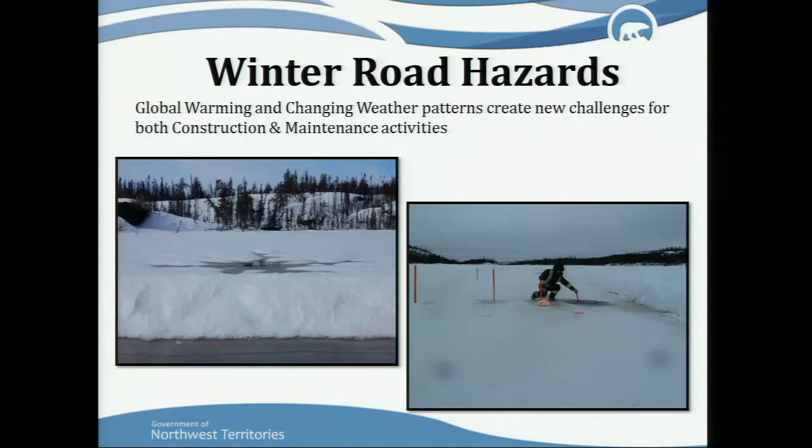So how is it possible that a winter road that just had a heavy grader go over it, or a heavy piece of equipment, a couple weeks before, has that? It's our changing environment - it's gases from vegetation, or gases from the earth, or something. That stick right there behind him has 65 centimeters, and that other stick has almost 80 centimeters. But there's actual open water right there where he is.

Again, this is the winter of 2015. We were about two-thirds of the way through community resupply. It warmed up for a couple of days, and we had some really strange stuff go on. Our primary lake, 35 kilometers long, and the South Inlet Road network broke up - just cracks all over the place, water pumping out of it.

So we put extra controls and measures in place. We brought highway patrol out, monitored the road 24/7 with our own staff, ensured people slowed down, and we were still able to get resupply done. So that's the changing environment we're working in now.

There's always an issue - no matter what you do or how careful you are, there's always a risk. This particular day, during construction, the snowcat operator had 30 years experience - spent his whole life building winter roads.

These cones here are the edge of the road alignment. We've got chains from here to there - that's about 6 feet - from there to there, we're in solid ice. We talked about those anomalies of stink holes or fingering and that kind of stuff.

This operator made his pass, was turning here to head back south again. Tracks are wide on it - he just happened to go outside the marked alignment he was in, bang, went through. It's critically important that once we profile, everybody stays within that alignment.

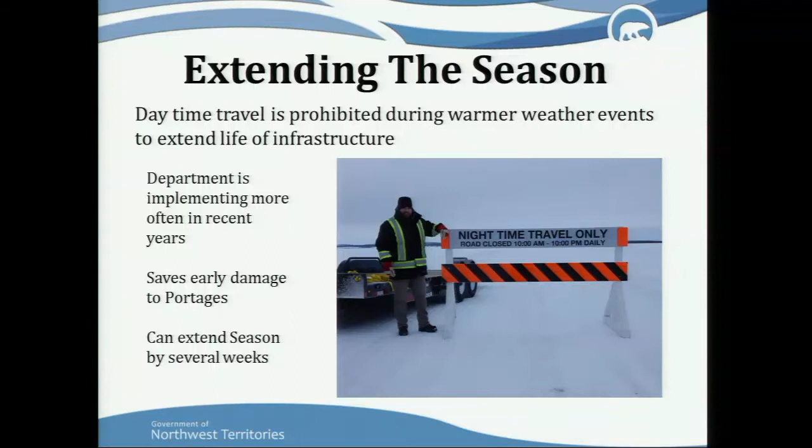Makes a big difference. We wouldn't have gotten our resupplies done in the last couple of years if we hadn't done that. And that was very problematic for the communities originally to buy into, but now that they realize it keeps the roads open longer and they get their resupplies done, their last loads in, we have buy-in from the communities on it too. So this was the second last day of resupply.

One of our lakes, overflow come in, the water started giving up. We had no place to push the water to. You're probably 18 inches to 2 feet to the front grill of that truck. It's coming back. And of course, you've got a couple members of the community waiting there to see where the truck's going to go through before.

And this is one of our company vehicles going through. This was closing day of the road, right? When you're out there and our front grill and bumper are making a wave in front of you, it's time to close the road.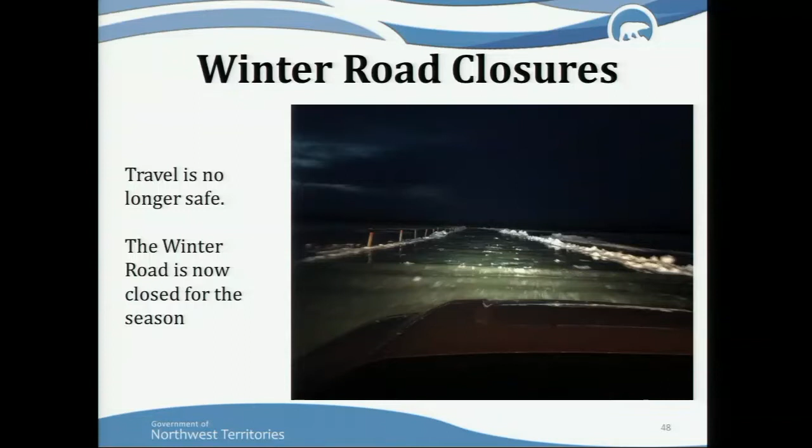So these two are kind of for entertainment, but there is a process in place to close the roads. There is a lot of knowledge and ability out there to understand and know when that time comes, and when it comes, that's it. We close the road. We're done.

And then in most cases, we try and barricade a road off. We can't always, because a lot of times the communities furthest up north, their road sections are still good. They'll still get wood and stuff like that from that end, but we'll close it on the south end so vehicles can't travel.

Anybody that was down Dettah road, somebody noticed signs on our Dettah road access. And the question is, why is there a sign there? Well, we have a liability, and if we don't have a road closed sign at the entrance to our road, we end up potentially with that. Long story short, that was a stolen car. Somebody thought they could make it disappear. They didn't realize there was a sandbar out there before it got deep.

Can't win them all. Thank you for your time. I went a little bit over, so I apologize for that. Is there any quick questions before we shut down? Thank you, everyone, really appreciate it. Oh, I'm sorry, was there one?

With the global warming, how much on average over the last 5 years would you say you've lost out of your ice road season compared to what you had years ago?

That's a really hard one to quantify because every spring is different and every fall is different. I could put it to you another way. We've put probably 5 to 10 times more effort into keeping our roads open than we did 10 years ago, okay? So we might have closed the road - like right now, our closing dates this year are about 2 weeks off historic. But the only reason we can keep them open that long or get them open earlier is putting more effort into it than we did before, and using new technologies, using lighter equipment, all those kinds of things.